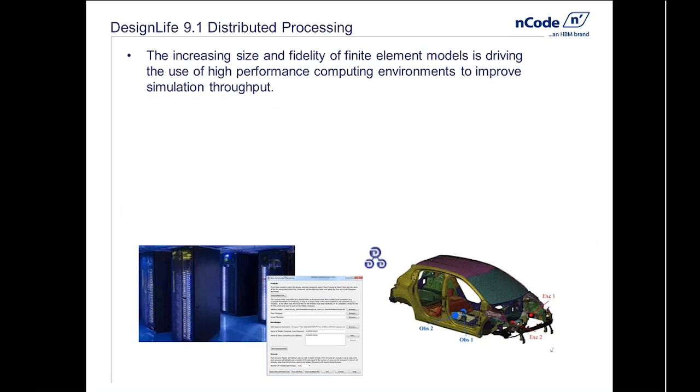So we'll be concentrating today on Design Life, and look now at some of the reasons for doing distributed processing. The main reason is that finite element models are all the time getting bigger. There's now much more availability of high performance computing environments, so you can improve the overall simulation throughput using those. As of Design Life 9.1, we've added the capability to distribute your analysis jobs across a number of machines or nodes on a cluster in order to speed up the analysis process.

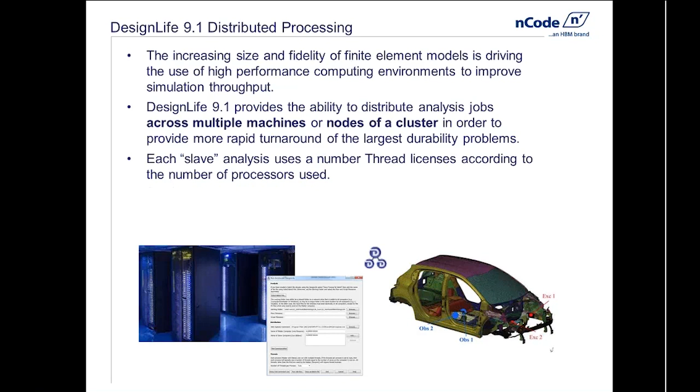We've always been able to run multiple threads in Design Life, but this has the capability of those threads being on a number of machines. In terms of licensing, each slave analysis process which runs on the different machines picks up thread licenses as normal based on the number of processors used. Currently this uses the Intel or the Microsoft MPI implementations that have to be loaded on each machine.

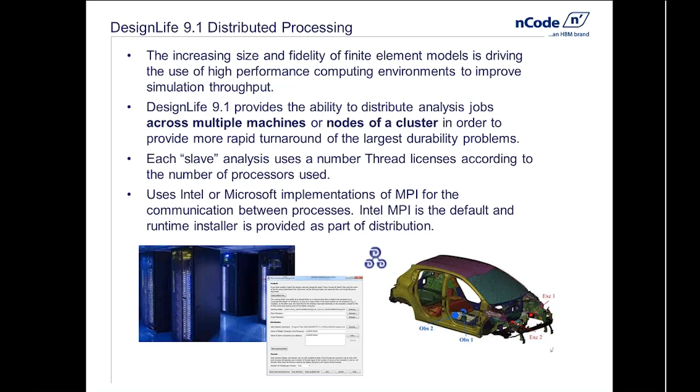We include the Intel MPI as the default runtime installed on the install kit for 9.1, and very soon we should be adding the IBM MPI installation to this. We had some problem with the licensing of that via IBM, but that's now been sorted out, so that will go in very soon - very latest in version 10, but probably before that too.

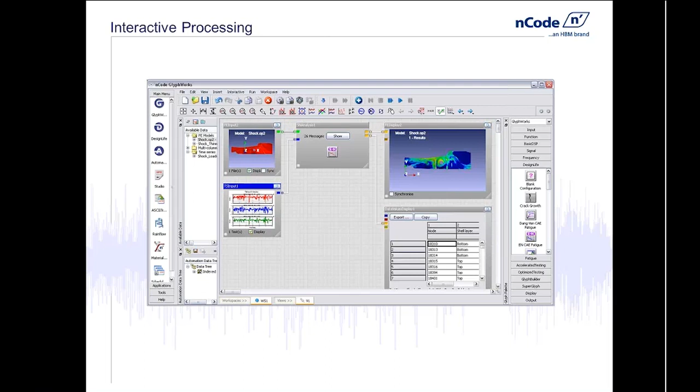And we have an easy way of running that process. You open the process up, you can then drop your FE models on, drop your time series on, hit the run button, run the whole process, or maybe run one glyph at a time if you want to step through for certain reasons. And while that's running, you get an in-process light, and you can see where you are in that process and how you are going through it.

Also in the diagnostic window, you get some progress execution. Also within the Design Life glyph, you get a run status to show you how far through you are through your entity list, and also a log of where you are in the job in terms of the overall position.

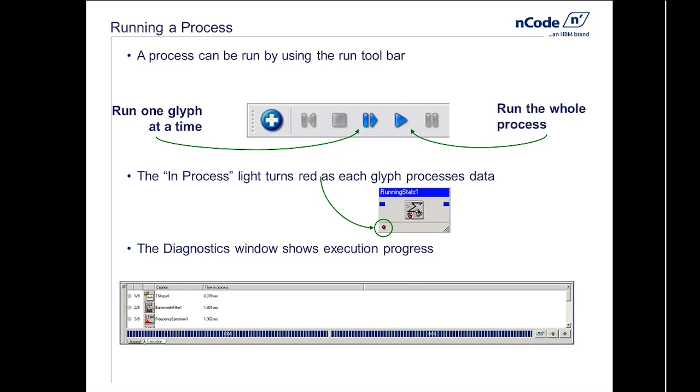Once you've got that process interactively, you can then save that. So the normal save is to save what's called a flow file. That is saving the glyphs, pipes and properties that define what you want your process to do. So that's not saving the data, that's saving the process that you can then call back and keep as your standard process.

Recall your standard process and drop on your new FE file or load files and run that process as it is. At version 7, we also added the ability to save that process with its data, meaning it saves the process along with the inputs and results currently showing in that flow. So if you run a very large design life job, you can save it with the data, and when you pull that file back you'll see the displays as they were at the end of the job. This may be useful if you've got large jobs you want to keep active. You can always save the results files and pull them back, but this just gives you a way of saving the overall process.

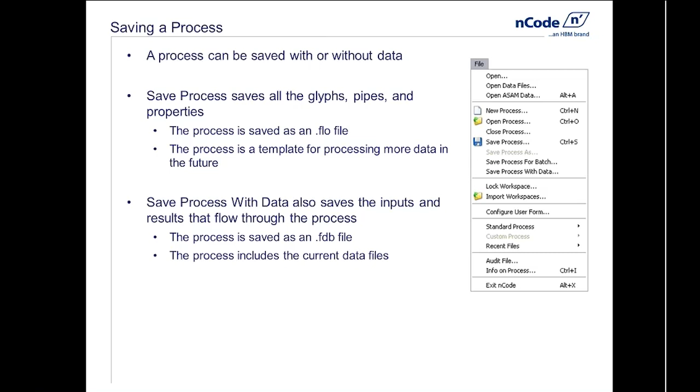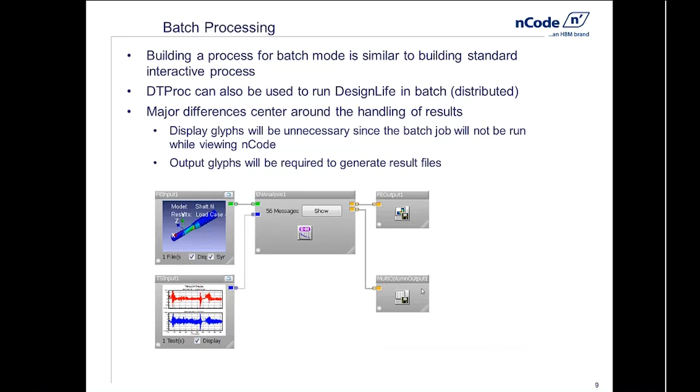In terms of those output glyphs, you can use standard metadata to name the output. In this example, we're picking an output format of nCode FER file, which is the standard nCode fatigue results from FE. In the output file name box, we're picking up the test name from the metadata and adding some extra text to create an output file name for where you want to save that.

One thing to remember is to set the overwrite to yes when you're going to run this in batch. Then you will get the output overwritten to each file, so each time you run the batch process you will get the results you want.

Also remember, we have a list of exposed properties on each design life glyph. These are the only properties you can affect within the process by changing them within the batch run. So if you want to change any particular properties that aren't exposed, you need to expose those properties with the Edit Exposed Properties option. That allows you to pick any of the properties set within the design life glyph, expose them on the front of the glyph, and then they're available to be set either by metadata or by batch lines within the script when you run from batch.

The difference when creating a process for running distributed is only how we handle the file input. Currently, the FE input glyph is the only input glyph supported. So your FE model can come in as standard from an input glyph, but any inputs in terms of time series, vibration input files, or material maps must be done directly within the design life interface. There's an object you can add to pull those files in from file as opposed to from the pipe. It's a matter of changing those in the advanced edit screen in your process to pull those files in directly. I'll run through that in the example in a minute to show you what you need to do.

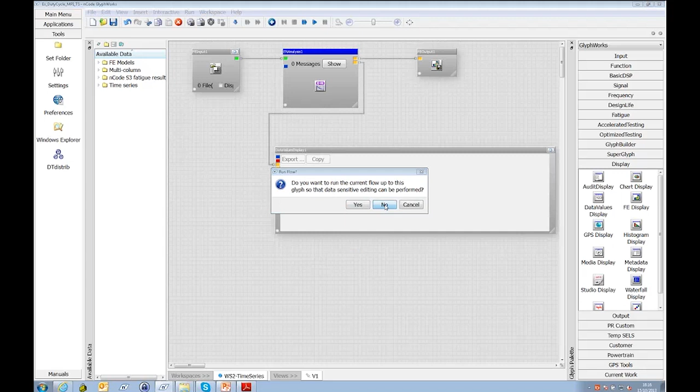So the first thing to look at, this is a standard simple process where I've got a time series input. So in this case, to run this in distributed in batch, I would have to remove the time series input, so I can delete that input glyph. If I then go to the advanced edit screen within the DesignLife glyph, I have a time series input from pipe.

So what I need to do is replace that, so I can delete it there, add time series from file, and at that point I can then browse to the file or set this in the script, but I can pick up my time series file directly.

So this process, once I've got the FE model on, is then ready to run interactively. You could run it, but also this is now available to run in a batch method that is running distributed.

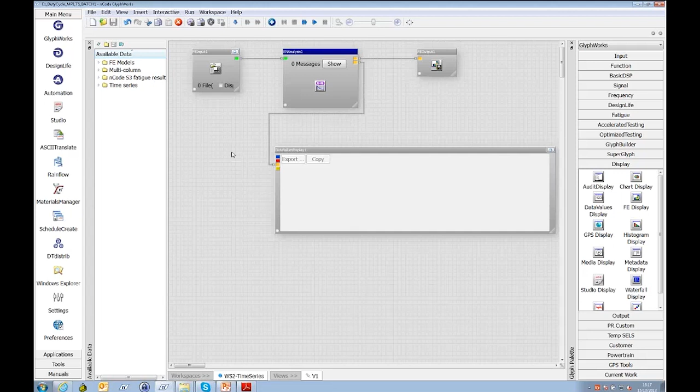So then look at the second example. So this is an example that is taken from our new worked example that is available in DesignLife 9.1. Work example 22 is a new one we've added to show the distributed mode.

So this is the same thing. We have an FE model, and in the advanced edit screen here we can see that there's the time series file I'm picking up directly.

So at this point this could be a duty cycle if it's more long analysis, or a number of time series files. So all I have to do to run that in batch, distributed, save process for batch, write this to a new flow file name. This then creates a batch flow file, a bat file, and a script file that will load all the properties in.

If we then look at the tools menu, you've got the DTdistrib process on the tools menu. I can now run this.

So I select the batch file. When I open the batch file, it loads up this particular working folder, the flow file name, and the script name. So that is now ready to run.

In the distribution section, I've got my own machine as my main machine and a second machine to run some processes on. At this point you can add a list of machines that are available to use. There are some security things you need to do this, but it's just standard network capability you need to be able to see the data across these different machines.

I can then test the communication. This will check whether this machine can communicate to the others in the right mode with MPI. And now I should be able to run that job.

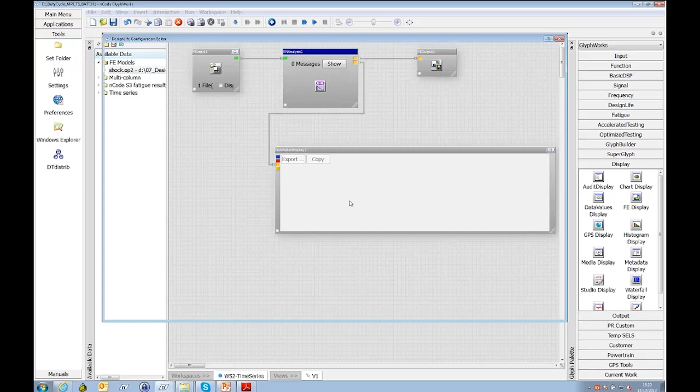Before we look at the output from that, we have added a couple of extra things at this stage to help you with monitoring that process. Within the interface you can see I've added a logger file. This is a file that gives you the same information as you normally get on the show button within the interactive mode. So whatever information you normally get there, you can see in this logger file, and that's now available to view at any point during the analysis.

So you can see how far you are through the analysis from that point. We've also added a progress file - this is basically the status information in terms of number of entities it's solved out of the total number. You can see that as a running progress throughout the analysis. So if you've closed down your DTdistrib interface, you can still find this file and look at that to see where you are.

And the extra output we've allowed is this property called output distributed source. That will add to your output file the number and rank of machines you've used and what the machine name was that did the solve for each different entity in the analysis.

So if we have a quick look at those files to show what has come out, we've got the job progress file. That's maintained at the end, showing you where your job progress was, at the end.

The log file basically shows how many threads I've started on each machine and which machines I ran on.

And then if I look at the output CSV file, I've saved the CSV file as well as the FE results file in this case.

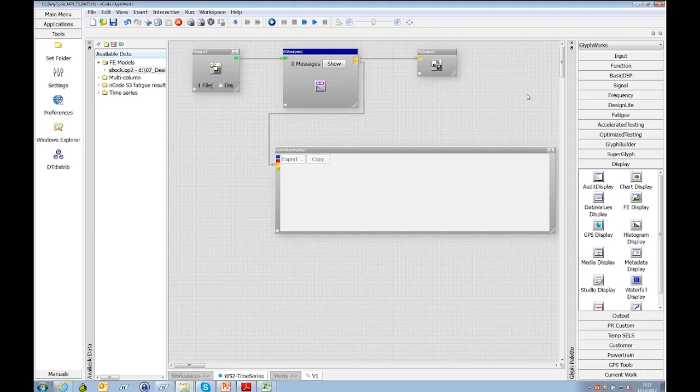One thing to mention: you do need a full installation of DesignLife on each machine you will be running processes on. In terms of directories, you can have a shared directory for all the analysis files, as long as that shared directory is visible from each machine, it can run data in a shared directory, or you can run it with copies of the data on each machine. The FE file just needs to be on the master machine, but all the road load data files, if running a separate directory, would need to be available on each machine.

So what we've looked at today: batch processes can be easily created within nCode and run. And now those batch processes can easily be distributed on a number of different machines by three main methods. First, using the supplied utility program we provided - if you've got an easy implementation, you can just point to those machines and use that utility directly.

If you want to change some things within that, you can edit the command files and run the batch files directly from a command prompt. So if you want to change the number of threads used on each machine to balance that thread usage, you can. And also you can take that command file structure and use that for any standard method you might have within your company, or any standard job submission system, to modify that file to use within those processes.